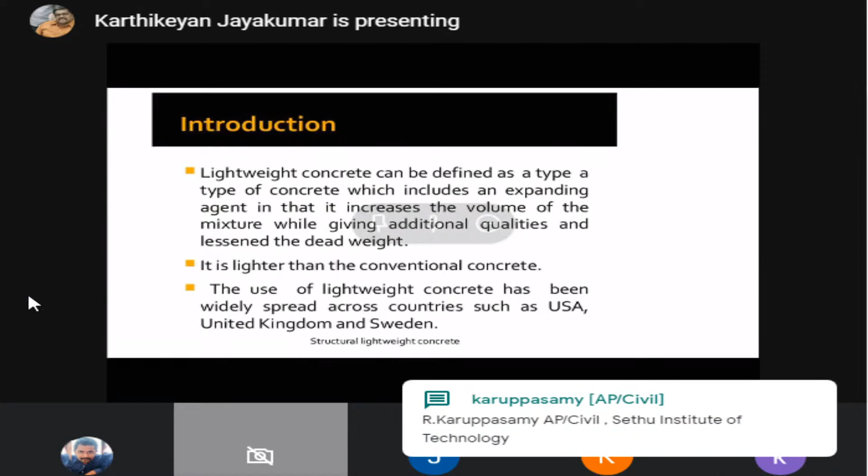So here we have to use some lighter weight material. We cannot make cement much lighter, we cannot make sand much lighter, it is impossible. The only thing we can make much lighter compared to conventional concrete is our aggregates. So we have to play with that, and make the density mark just fit into that category. So what are all those lightweight materials?

Not all materials can be used as coarse aggregate in lightweight concrete. There are certain criteria. Normally when you see the guidelines for selection of coarse aggregate material, they say the aggregate should be tough enough, it should be sound, it should have good thermal resistance, it should have a very good repellent capacity, it should not absorb more water. So many criteria are there, and it has to bypass all those criteria.

The physical characteristics, the dirt should be completely removed, the aggregate should be clean and sound. They used to tell all those things. So what are all the materials that we can use to make concrete light, and what are all those lightweight aggregates, we will see in the field.

Before going to this, this is what I told earlier. If you see in this first slide, the theoretical portion, one of the advantages of using this is your dead weight of the structure gets completely down. Whenever you do some RCC calculation, say your beam size is something like 230 by 500 mm.

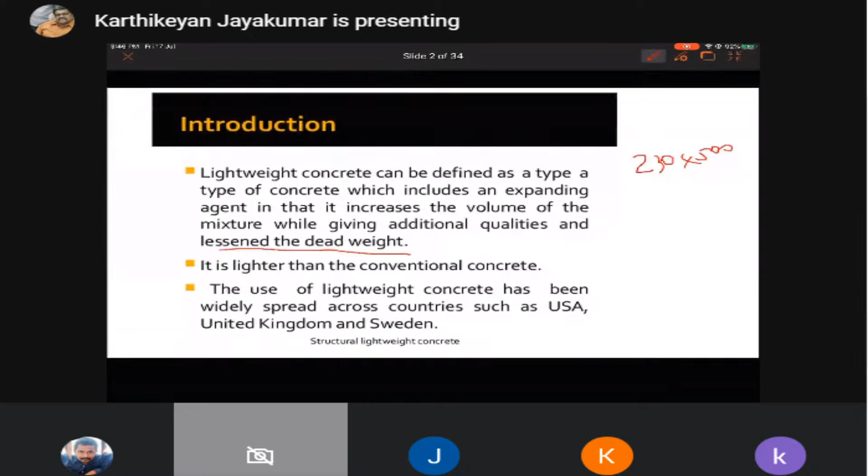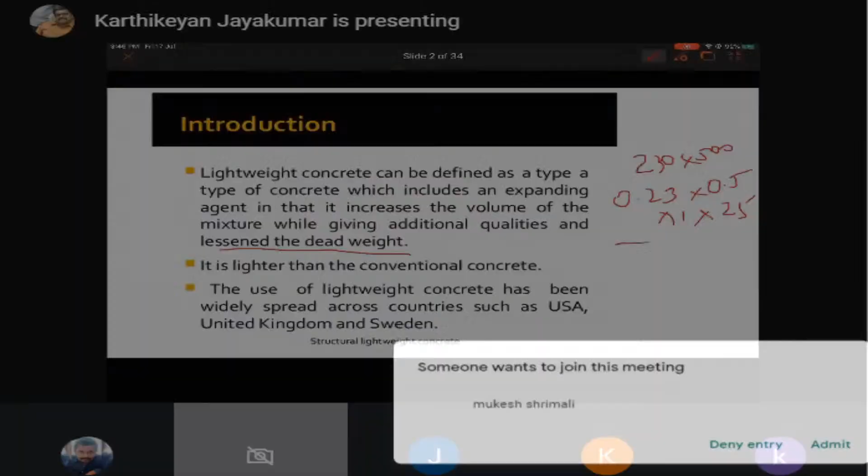But if you use lightweight aggregate with a density of, let's say, 150, just imagine the difference between 250 and 150 - that's 100 less. So nearly 100 kilogram is reduced for that structural unit, and it becomes very easy to handle. This is one idea behind it.

This is how you have to categorize the things. This is the advantage of using lightweight concrete.

So whatever happens, when your member is not much stiffened - if it is more stiff, it will be more prone to earthquake damage, because when it is too rigid, a horizontal excitation can cause the rigid structure to overturn at some point. It won't be able to bear that much horizontal excitation like an earthquake. When lightweight structures are used, the overturning moment and everything is fairly reduced.

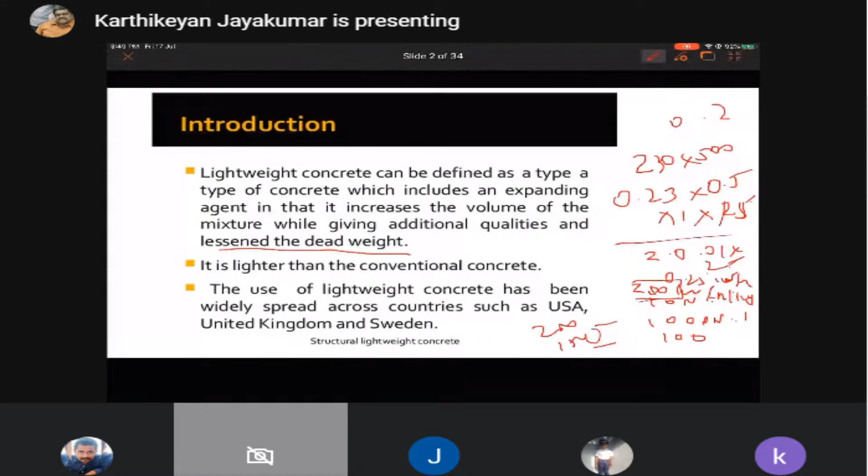I'm not saying it will not fail - it will fail, but the life... just imagine there's an earthquake and a beam or slab falls on your head. What would be the impact? You'd get injured - something falls on your legs, your shoulders, or a major accident happens, or a portion of the slab pierces and falls down. When conventional heavy weight is used and the dead load is high, the impact is worse. With lightweight, this effect can be minimized, so the overturning moment and the cause of failure are reduced.

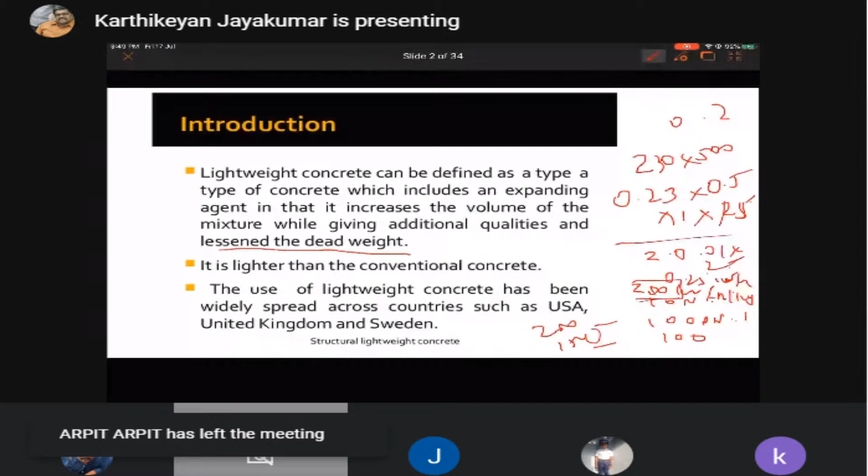Lightweight concrete has had widespread use in countries like USA, UK, Sweden and a few other European countries, where people use it as a traditional activity. Even in the US nowadays, houses use lightweight construction. They plan and orient the building and mostly go for wooden construction, since those are more prone to cold areas - they use lightweight concrete or wooden panels and wooden floors for house construction. Concrete construction is minimal for them. Most places go for only this lightweight component.

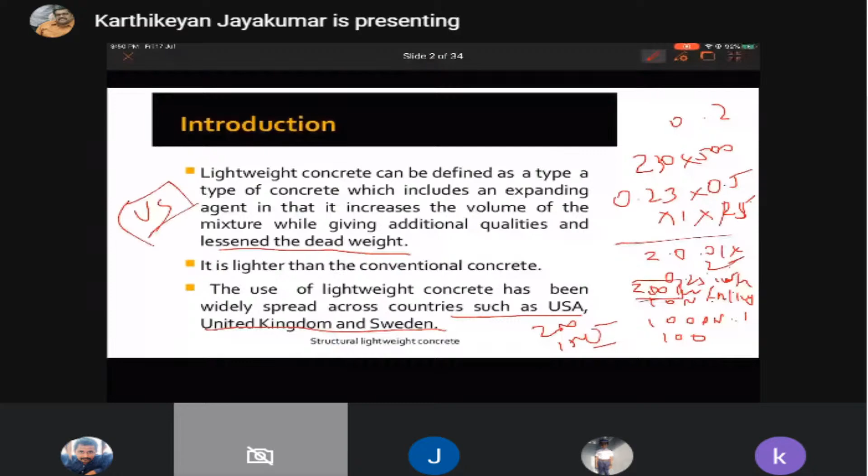In the next part - I mentioned structural lightweight concrete - how can it be made? It should have less density. As I told you, the density should be within 1300 or 1350 to 1800 kg per meter cube. Only then can you categorize it as structural lightweight concrete. You have to ensure your concrete density meets this range.

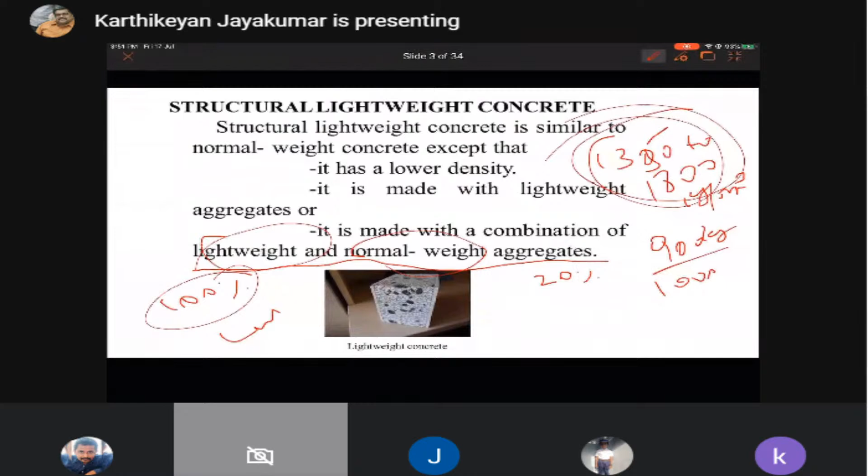There's a provision given here - you can use a combination, such as 30% or 20% normal weight aggregate combined with lightweight aggregate to achieve this density. It's possible, but you cannot use even 100% lightweight material, because then it might get down to 900 kg per meter cube. The density of water is 1000, so when you pour that concrete into water, if submerged, it will float - that is called foam concrete. That's another topic we'll cover in forthcoming lectures. This is the aspect to keep in mind for structural lightweight concrete.

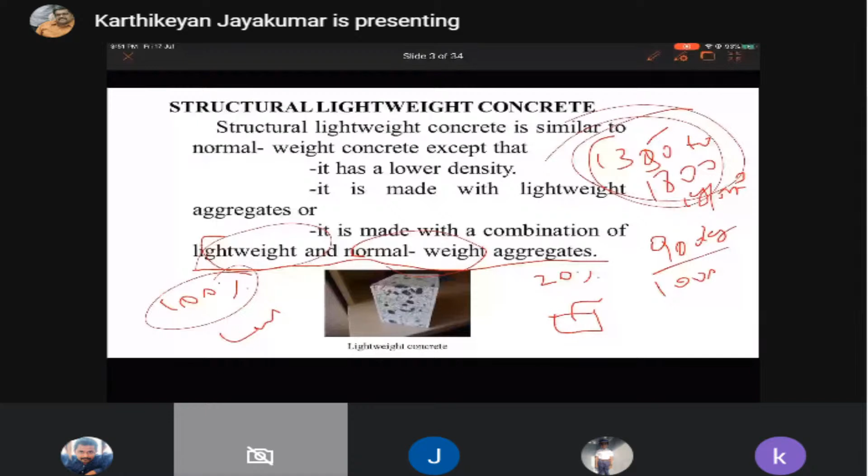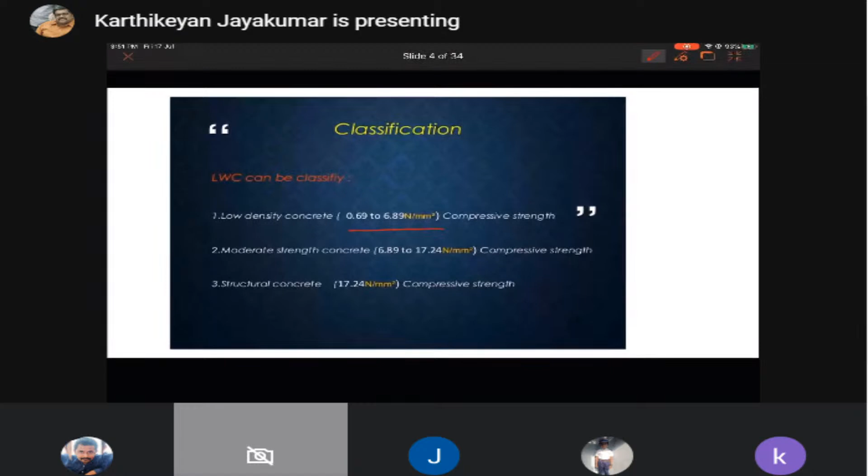So what are all the probable compressive strengths? If your compressive strength is categorized, say you are getting only 0.69 megapascal to 6.89 MPa, and you made a lightweight concrete testing the cube, with a density like 450 kg per meter cube, how will you categorize this? This classification is called very low density concrete.

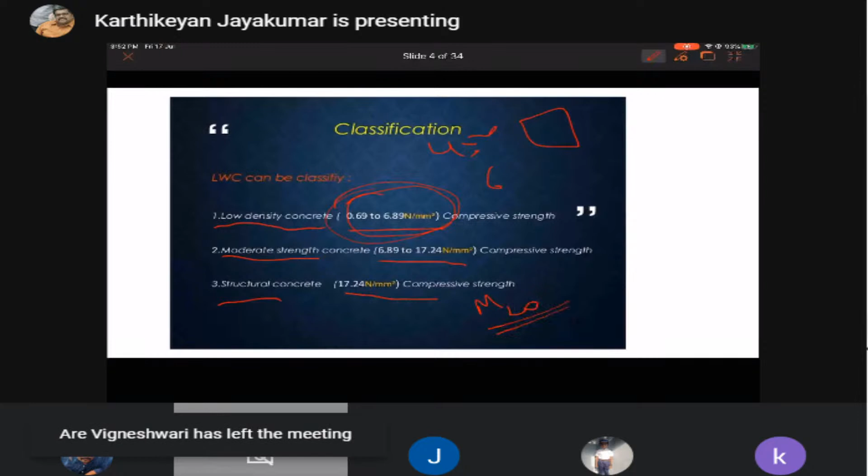When it is between 6.89 to 17.24 MPa, it is moderate lightweight strength concrete. Structural lightweight concrete is classified when it is above 17 MPa. That's why I told the minimum grade of concrete for structural lightweight concrete is M20. This is very important, you have to keep these things in mind, then only this classification will serve the purpose.

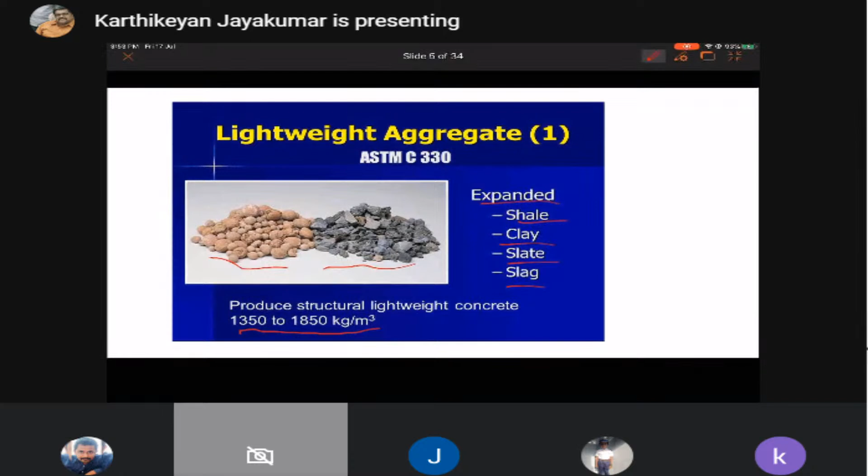This classification is given according to ASTM C330 category. Like how we have IS 456-2000, IS 10262, the ASTM classification is American Society for Testing and Materials. So like how we have Indian standard, this is American. ASTM classifies the lightweight aggregate for structural purpose as one of the classifications.

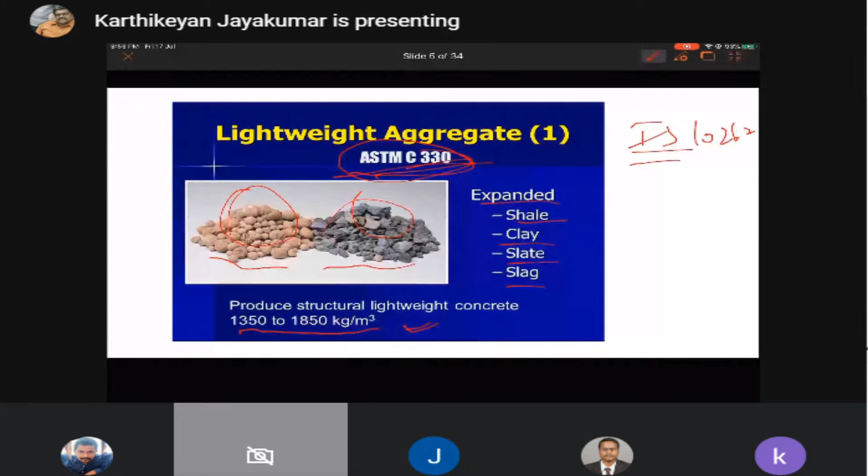So how can this lightweight concrete be achieved? It can be achieved in three different ways. First, replace normal aggregates like shale, slate, whatever it is, by some cellular porous or lightweight aggregate, you can bring that. Next category, you can introduce air bubbles into the mortar, which is called aerated concrete. Then you can completely omit the sand and use coarse aggregate, which is called no fines concrete. So these are some possible ways.

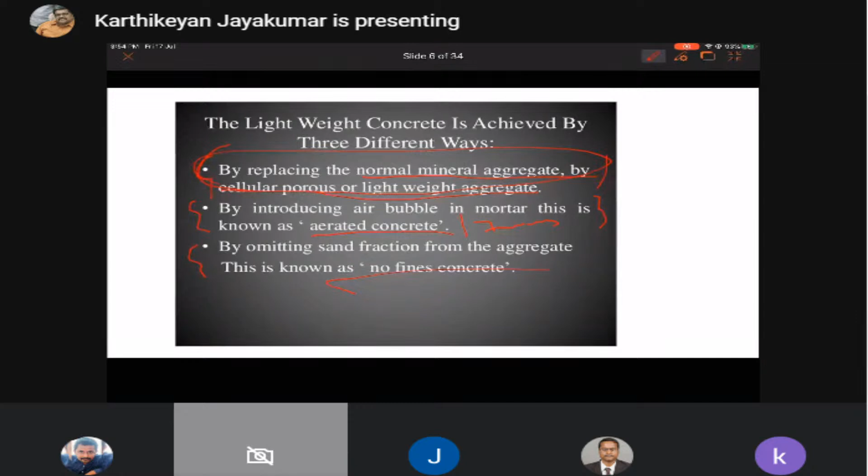How to make this aerated concrete, how to make this foamed concrete, all these things will come in one category. In another category, you directly have certain lightweight aggregates like expanded shale or slate, many categories like that, because it's a naturally available form. In some places you might not have this mineral or type of aggregate; say aggregate X is not there, but aggregate Y will be present. So depending on the place, you can choose the appropriate aggregate. These are the three different ways you can use.

No fines concrete is very useful for pavement applications, especially where water gets logged into the pavement surface, causing potholes in roads. In order to avoid potholes or damage in the road, they use no fines concrete. I have a beautiful video, you can see that in the later part of this lecture.

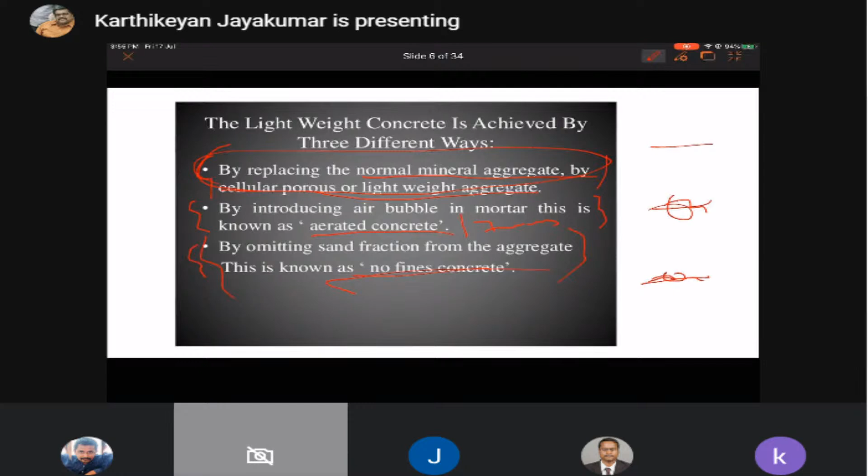Let me now quickly move on to the next slide. So these are the first category, using some lightweight aggregates. Natural lightweight aggregate and artificial lightweight aggregate - again categorized into two types. Under natural aggregate you have pumice, scoria, rice husk, diatomite, volcanic tuff, foamed lava. These are all natural forms.

Artificial lightweight aggregate means we have to manufacture it: sintered fly ash, foamed slag, bloated clay, artificial cinder, expanded shale slate, coke breeze, expanded perlite, exfoliated vermiculite. These are all artificially available lightweight aggregate materials you can use.

From one place to another, volcanic tuff might not be available in one locality, but scoria will be abundantly available. Scoria is obtained from aquatic plants, found in river beds and deep sea beds where you can extract it. It is in the form of a reef and other things, which are highly lightweight, so those things can be used as an aggregate.

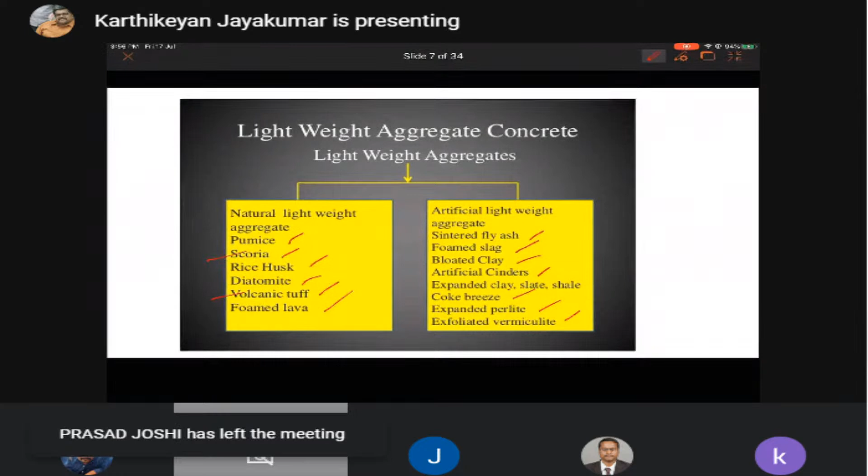I'm telling you, the explanation of each and everything will be shown in the forthcoming slides.

The first aggregate is pumice, a rock from the volcanic region. Its bulk density varies from 500 to 800. The texture is fairly even, interconnected with voids, and it is very light colored, nearly white.

Scoria is a lightweight aggregate of volcanic origin, dark in color. I earlier said scoria is aquatic, but that's not correct - diatomite is from aquatic sources. Scoria comes only from volcanic regions, wherever volcanoes are found. The dry form is simply slightly weaker than pumice - that is its property.

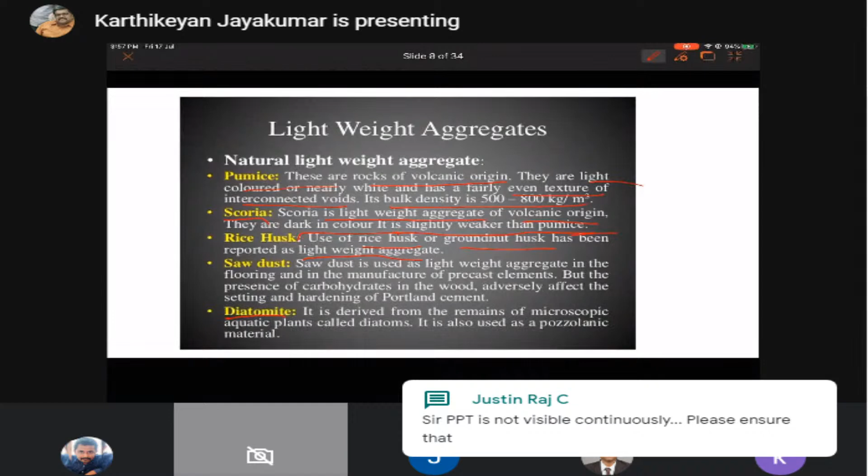Next is rice husk. The use of groundnut husk has been reported as a lightweight aggregate. Many people have used it because it is very light - the shells and everything are very light - so they have used that for this purpose.

Next is sawdust, used in the topping of floorings and other applications - that is very essential. But the wood adversely affects the setting and hardening with Portland cement. That is the only problem - setting time issues arise when you use the wooden material directly.

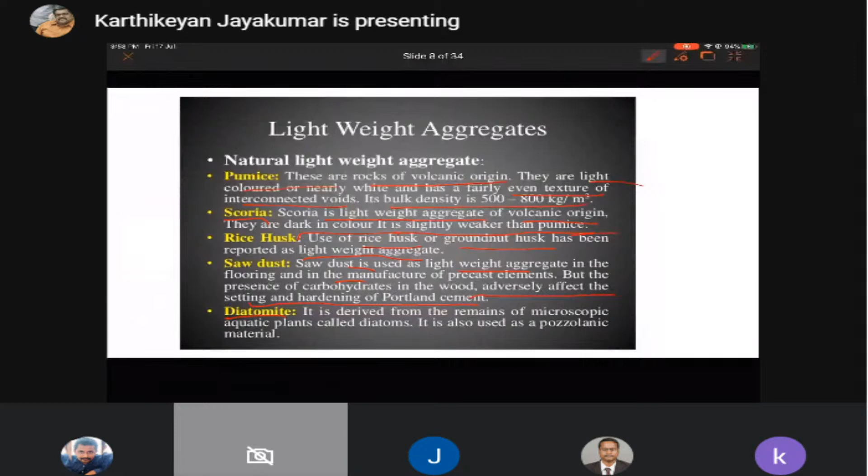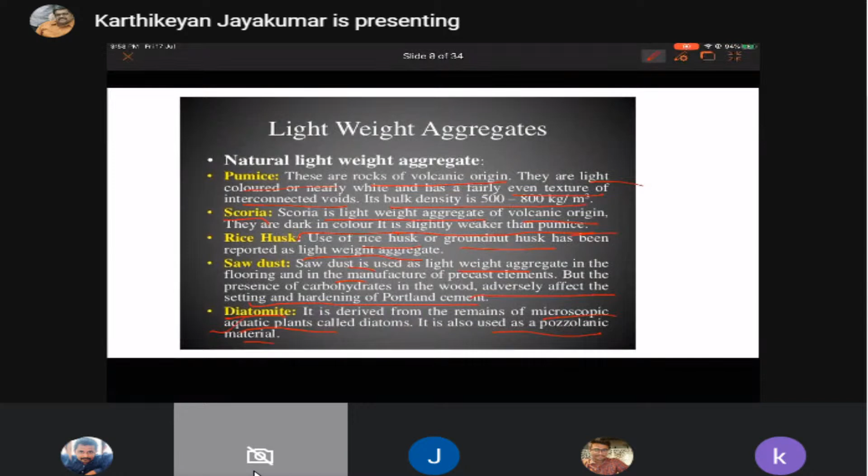The next one is diatomite, as I mentioned, from aquatic plants. It has a high pozzolanic property, acting as a high pozzolanic material. It is quite microscopic, comes from aquatic plants, and is very light in weight. These are some natural lightweight aggregates.

This photograph shows pumice and what scoria looks like. Mostly these are obtained from volcanoes, which is why you get these sorts of pores, due to the melting of molten magma and other factors.

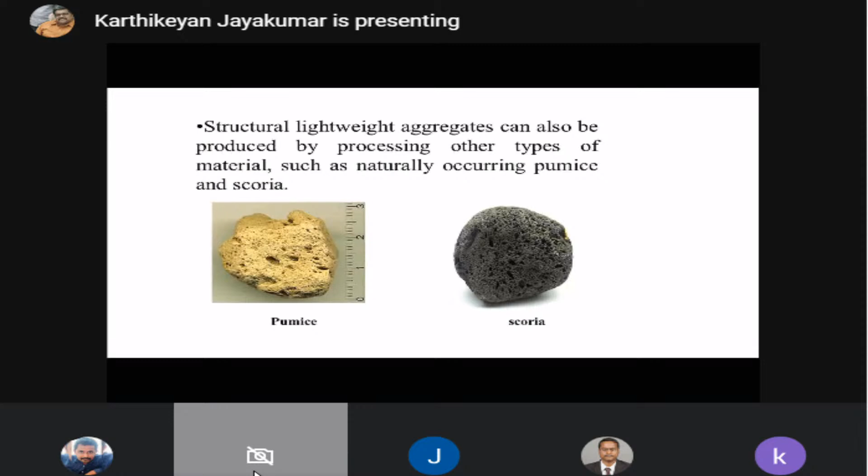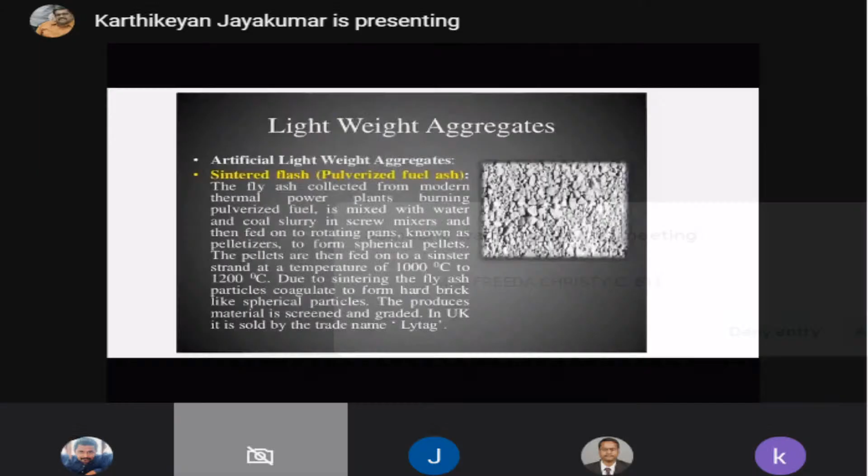The next lightweight artificial aggregate is sintered pulverized fuel ash, that is fly ash. You know how fly ash comes about - you artificially create small round pellets. You can also manufacture using slag, through some treatment process.

With that treatment, bloated clay is also available, which tends to expand. When using gas forming agents with it, it gives very good marine applications. Especially for aerated concrete, you will use this gas forming agent - it acts as a gas forming agent.

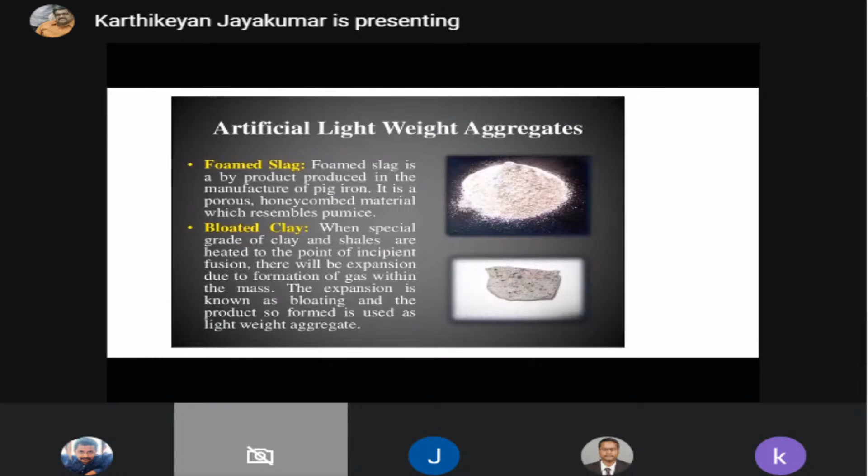Bloated clay, since it has an inbuilt structure like exfoliated vermiculite, is similar - these are used for fertilizer and animal feeds, as a small portion in animal feed. So that one we can also use.

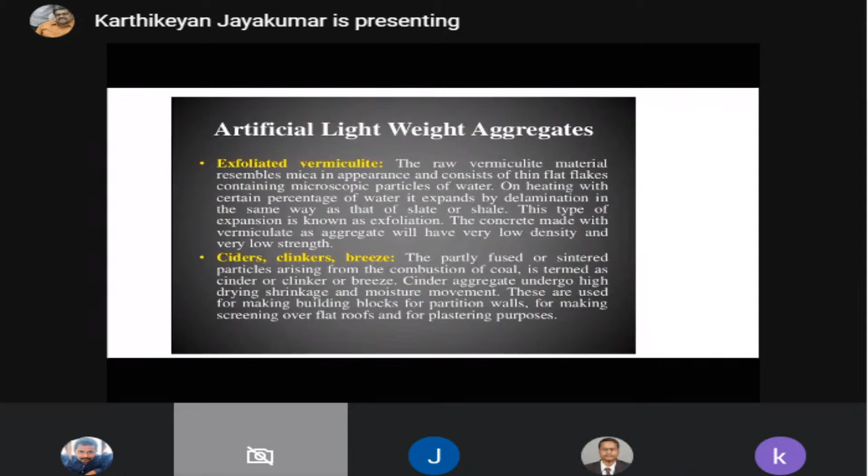Then cinders and clinkers are all obtained from coal, as various formations of coal. Black coal is different, and lignite is a type of coal with different parameters. Similarly, cinders, clinker, breeze are all types of coal byproducts, with performance varying and abundance differing from place to place.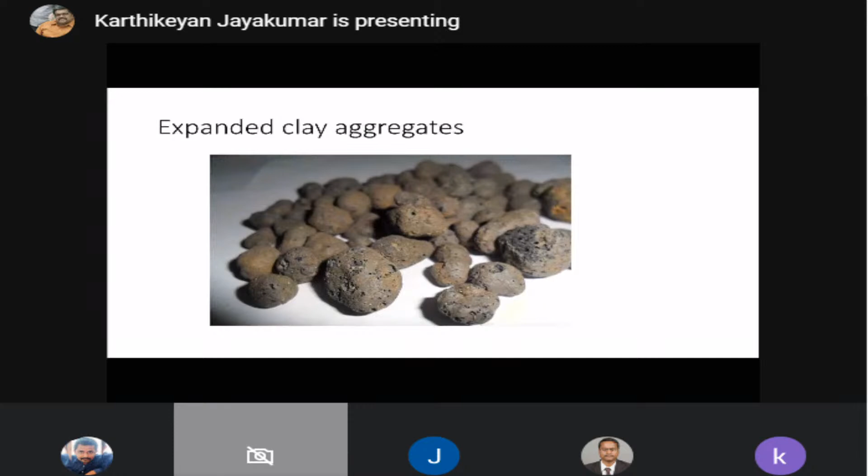But you have to be very careful when using glass aggregate. I won't normally give this work to my students, because with glass you have to use steel gloves and handle it carefully - you cannot handle it with ordinary hands, and rubber gloves won't work either since it will tear and the glass will pierce through. So I am a bit reluctant about this.

When using glass aggregate, you must ensure there is no reactive silica. If there is reactive silica, it will create durability issues, like severe alkali aggregate reaction and other problems.

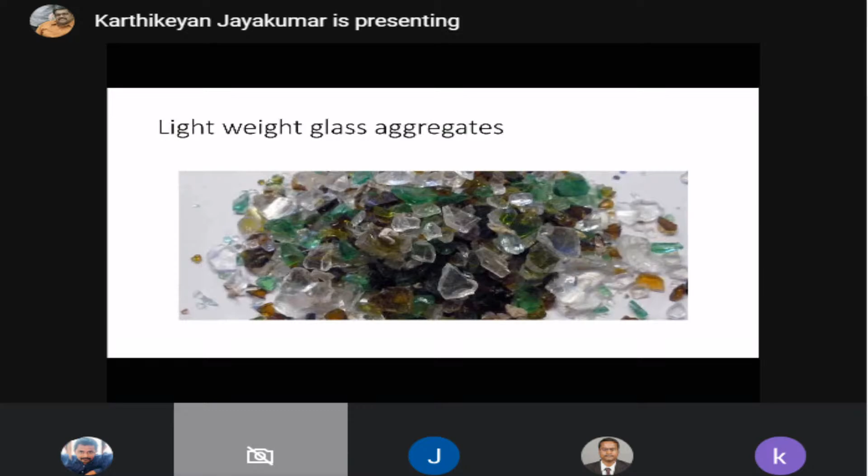So you have to take care of that. But glass aggregate, I am highly reluctant to use, though it is a very good material, very lightweight. The handling is problematic because some portion of those things can tear your fingers or enter into your skin, even small glass pieces at a micro level, and it might affect your veins and other things. That's why I am very reluctant to give it to my students.

So these are the various forms of glass. They have sieved it in different types of sieves, say from 0.1 mm to 8 mm sieve. This is how they have artificially manufactured the glass aggregate.

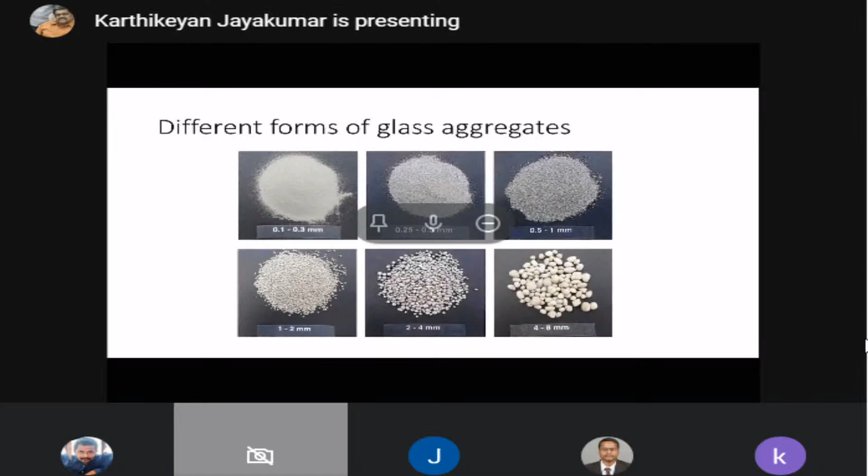Now with this, when you use these things naturally, what is the advantage? The first and foremost advantage of using this lightweight aggregate is cost. But when lightweight aggregate is marketed, it is very costly. If you are able to manufacture it on your own, it is good and very cheap. So that is one thing.

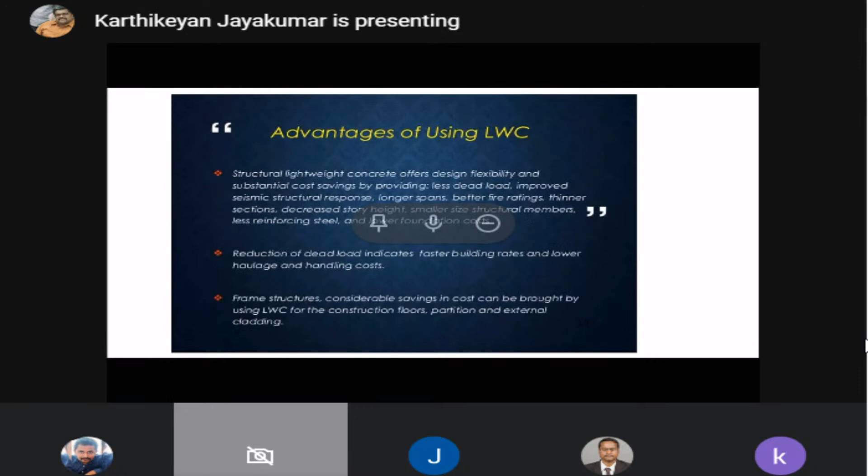Then, as I told you, one salient point about seismic excitation whenever it occurs - here you have less dead load. That is the purpose of using lightweight concrete, but more importantly, it gives improved seismic structural response. So that is key here.

Lightweight concrete also has very good fire resistance compared to normal weight concrete. Because of its lighter weight, it has very good resistance and will not burst, because when the toughness of the aggregate is more, and the coefficient of thermal expansion is quite large for conventional aggregate, but for these lightweight materials the coefficient of thermal expansion is much less, that's why it withstands fire better. So this is one advantage.

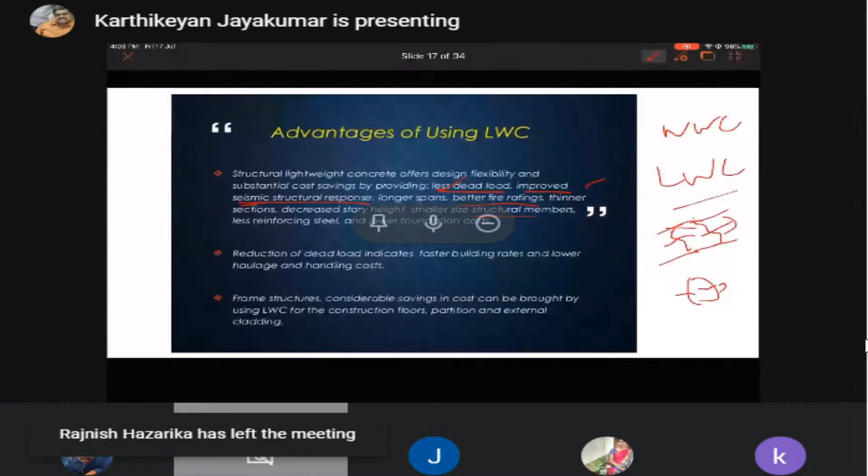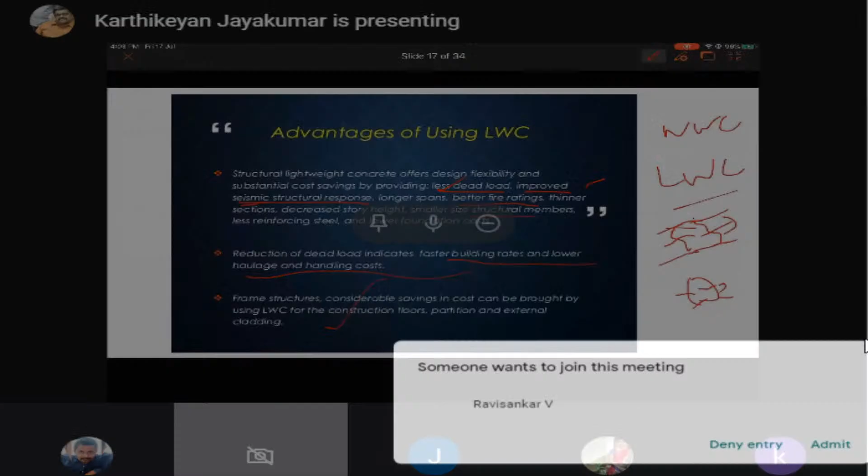Naturally, it allows faster building rates - you can erect structures as quickly as possible, the lighter the weight. So in framed structures, using lightweight materials for partition walls and other things is very advantageous. This is the main advantage of using structural lightweight concrete.

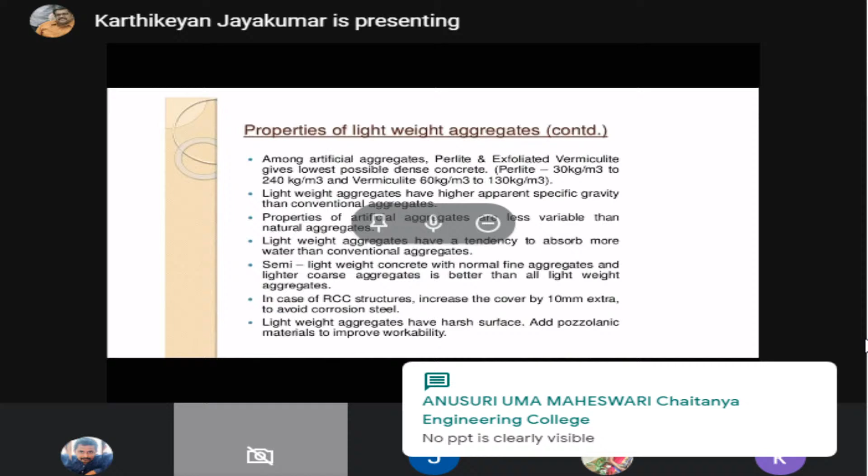Otherwise, if you want an overlay where the dead weight of the structure should not be fairly affected, you can use a lightweight material for overlaying purposes - for example, vermiculite-based lightweight concrete. Especially for electrical linings and similar applications where you want to seal it later with some additional layer, but the dead load of the structure should not get disturbed, a 300 kg per meter cube concrete will be very valuable. So that is what we are talking about here.

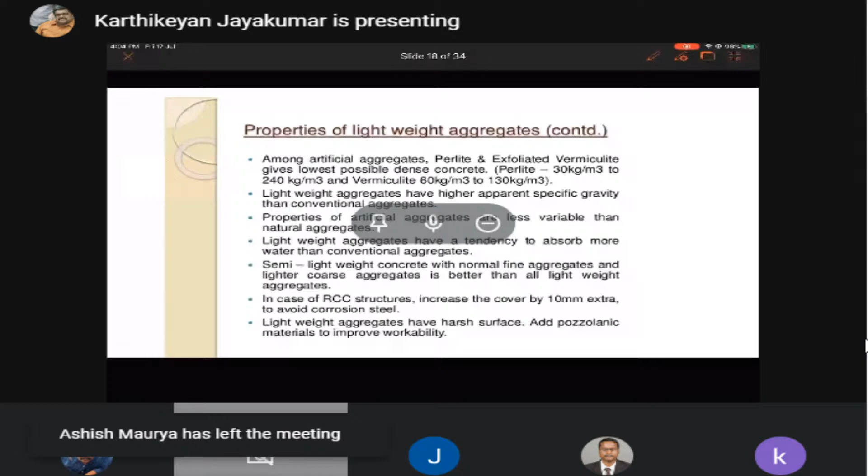Apart from that, the next disadvantage is that it will absorb more water. Lightweight aggregate absorbs much more water. Suppose your water absorption is 0.7% for conventional aggregate, but for lightweight aggregate it can even be 28% or 30%. So it can range anywhere from greater than 1.5% up to 30%. You have to account for this absorption rate properly and design accordingly. If you fail to do the water absorption tests, it is not advisable.

It will fairly affect the flowable characteristics of concrete. Another important point is that you have to increase the cover size when you go for lightweight concrete - an extra 10mm or so - in order to avoid corrosion, because it will be more prone to corrosion. Due to its lighter weight, you will not have a dense transition zone, so the bonding will not be very significant and it will not be highly impermeable. So you have to increase your cover size. Suppose normally you keep 25mm cover size, when you use lightweight aggregate you have to keep 35 or 40mm. That is the only thing you have to watch out for.

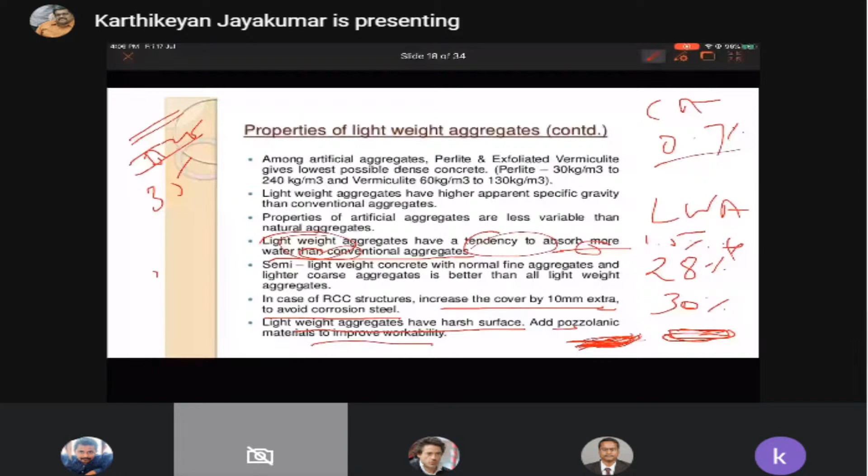Okay, so these are certain things. Lightweight aggregates have harsh surfaces, so add pozzolanic materials to improve the workability - you have to use some chemical admixture and also some mineral admixture to keep your strength intact. Suppose you want 30 MPa or 35 MPa strength with lightweight aggregate, you cannot achieve that with the conventional approach alone.

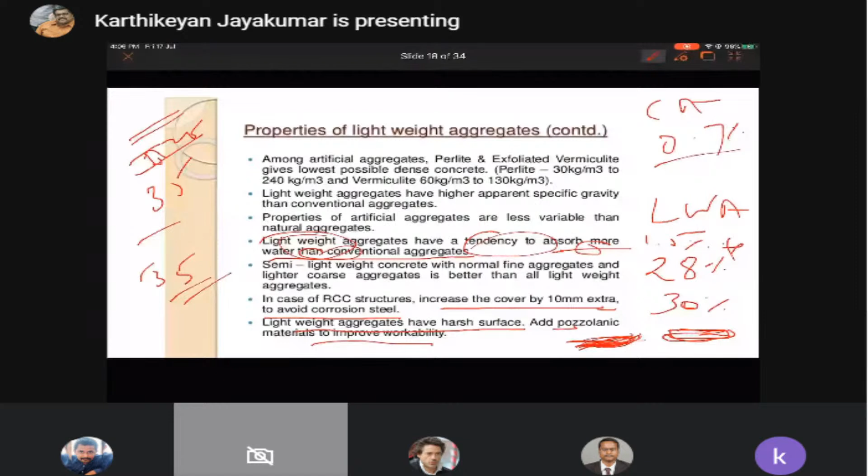You will get only about 17 or 18 MPa, but if you want 35 MPa, you have to take the help of these pozzolanic materials. This is another important parameter which you have to consider.

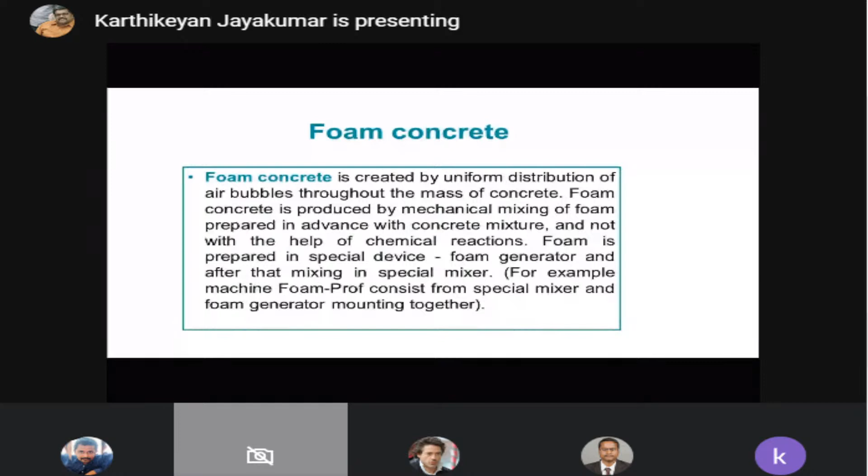Next type is foam concrete. For this you need a foam generator to mix the things, so you will be using some gas forming agents. You will be creating air bubbles inside, and it will come like a foam, where you can see lots and lots of air voids. This is called foamed concrete.

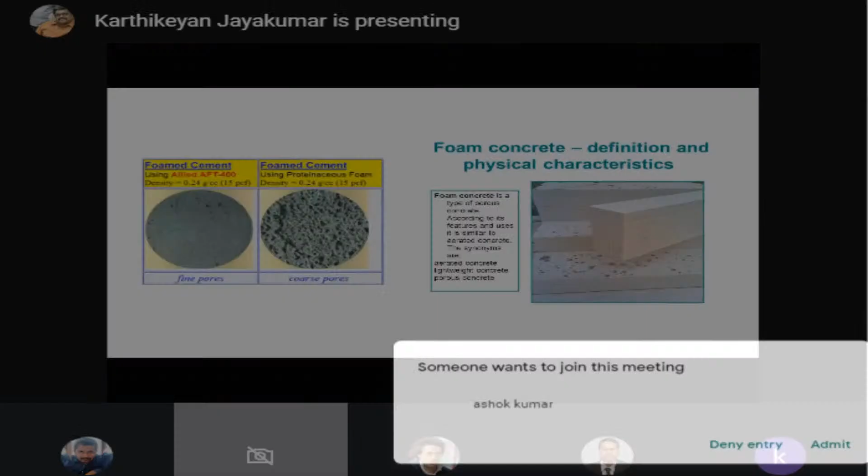It is also called aerated concrete. If you just put it in water, it will float, since the density is very less, just about 900 kg per meter cube. See here, it is not 1100 — it will be less than 1000, it should be 900, then only it will float. If it is 1100 kg, it will not float.

Normally, you will get a strength of only 12 to 14 MPa for the foamed aggregate. So this is the finish of foamed concrete.

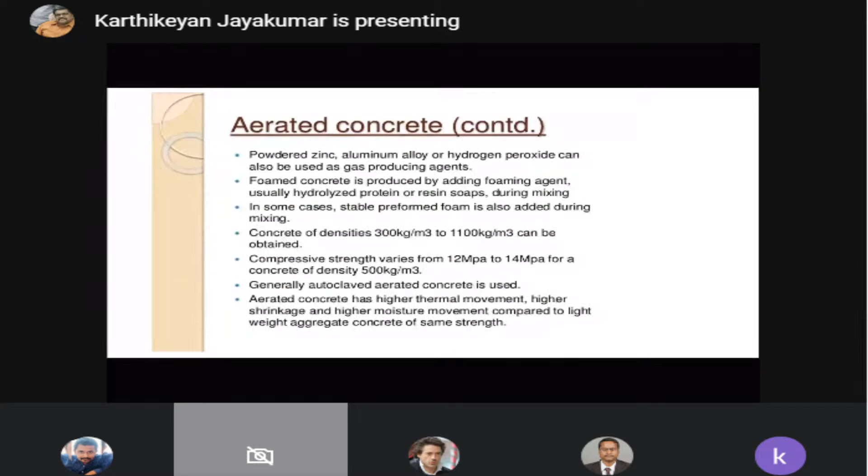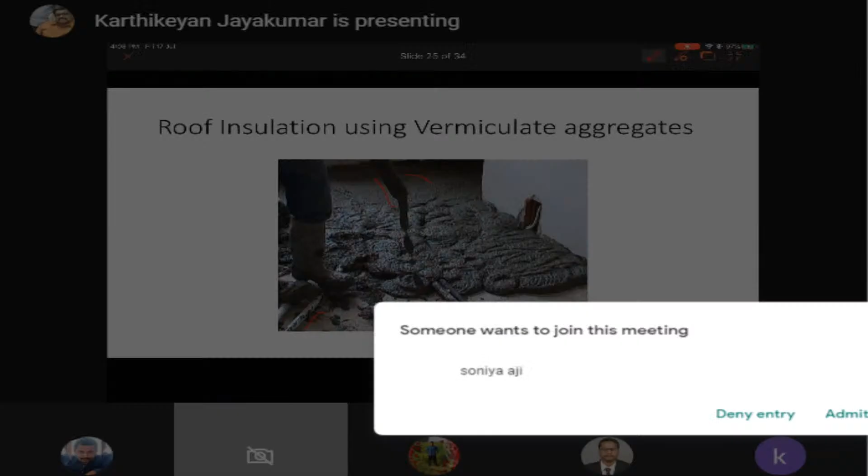So these lightweight aggregates for insulating purposes will play a vital role. That plays a major significance. In this way, lightweight concrete and other things are very useful.

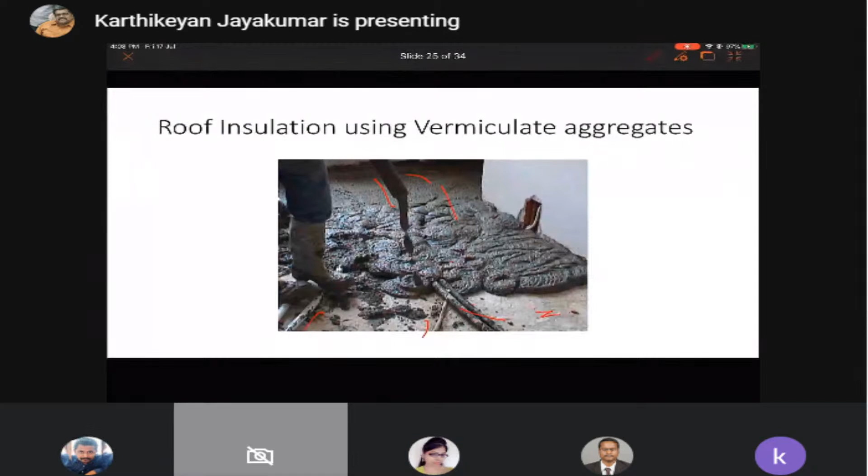Next, no fines concrete. In no fines concrete, you will not use any fine aggregate — you will be using coarse aggregate and cement, where if you pour water, it will act as a drain. This will be very useful for pavement applications. This is also called pervious concrete.

These are some innovative applications for pervious concrete, especially for retaining walls, where the seepage of water is very high. When you use this pervious concrete, it is very effective — for stormwater drainage or some deep weep holes for stormwater drainage, these will all be very helpful. Pervious concrete will be very useful.

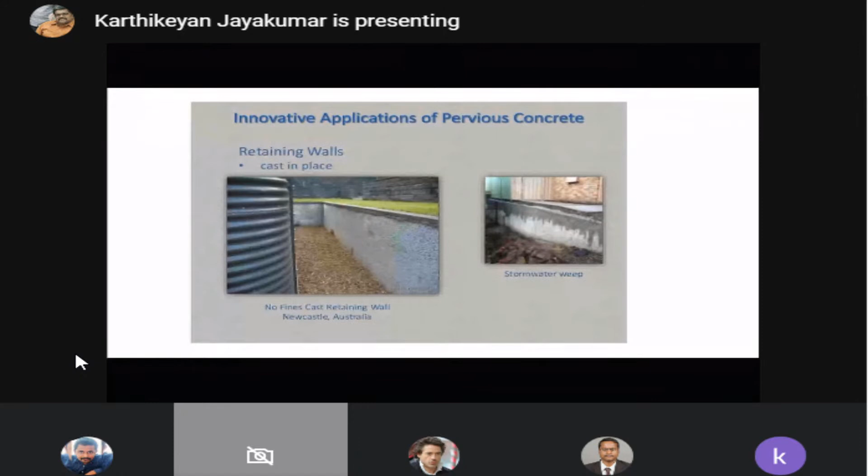This is a video showing pervious concrete, which will be a 1 minute video. You can see this — parallelly, you will be getting some wordings also. You can just see this. It's a very nice video about lightweight concrete and pervious concrete.

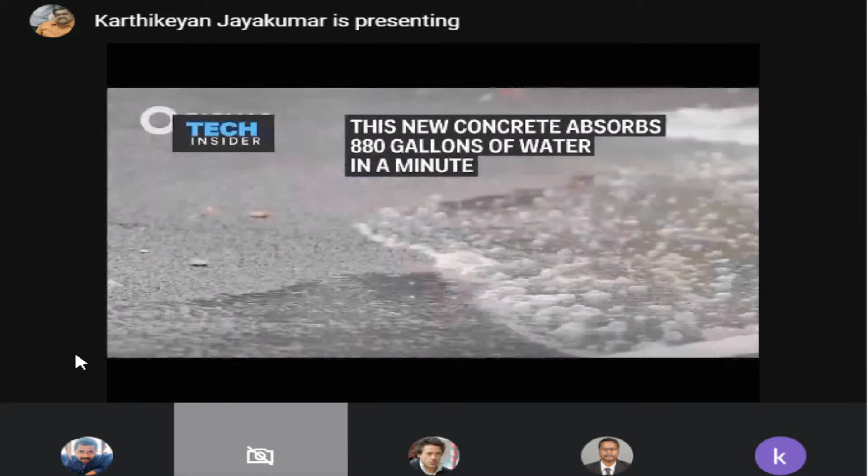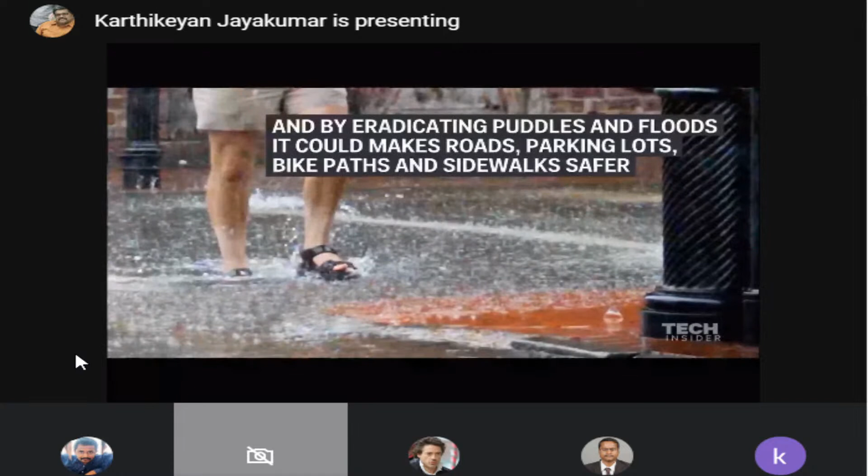See here, this is the no fines concrete, no aggregate, no fine aggregate.

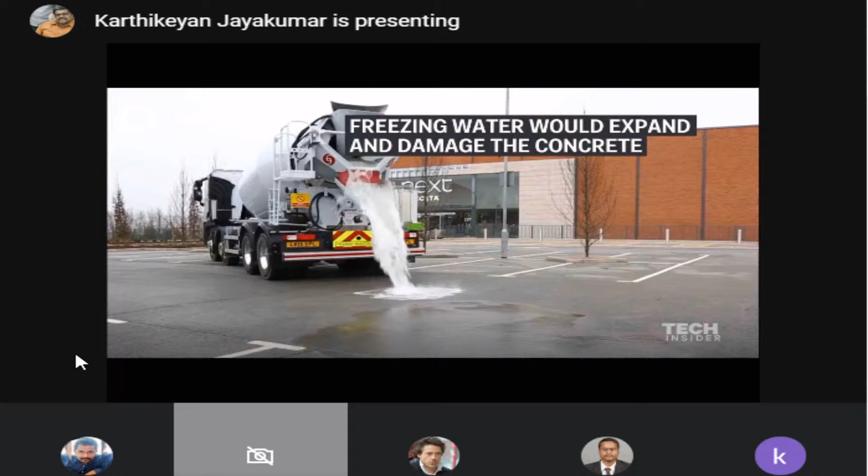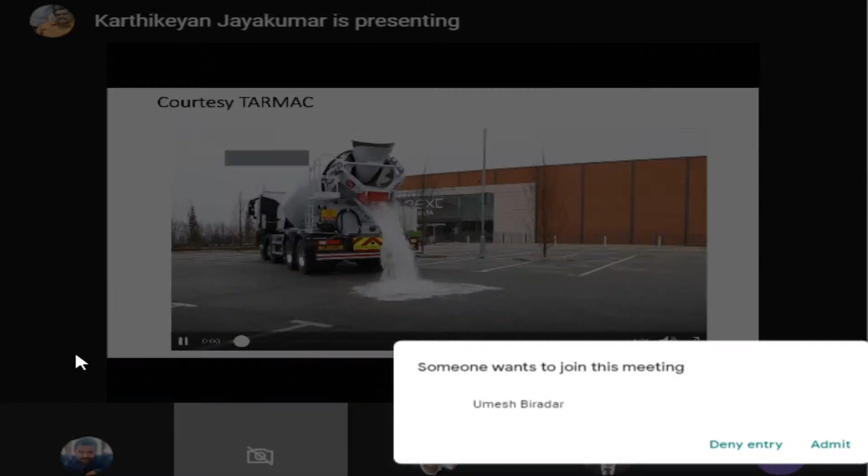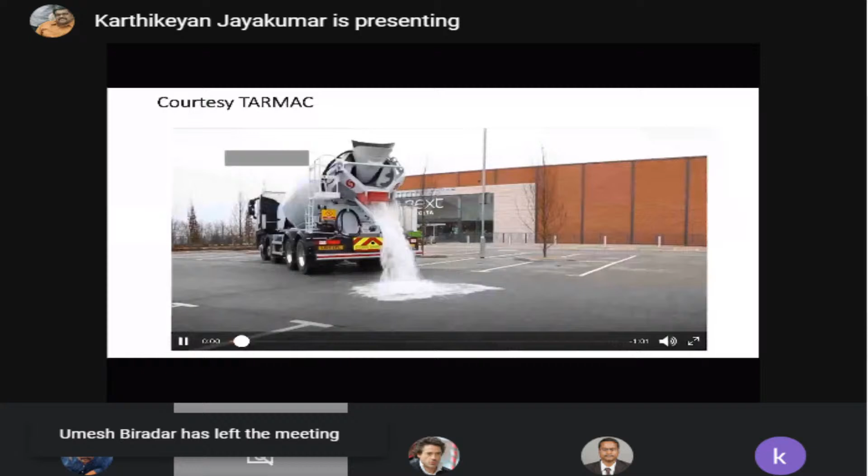That is the advantage of using such things, because you see nearly 600 to 900 gallons of water was poured on the paved surface, and see how nicely that concrete behaves — it has a very good absorption capacity. So thereby, if there is a heavy downpour like this, what happens? It acts as a groundwater recharge technique, so the groundwater will be recharged.

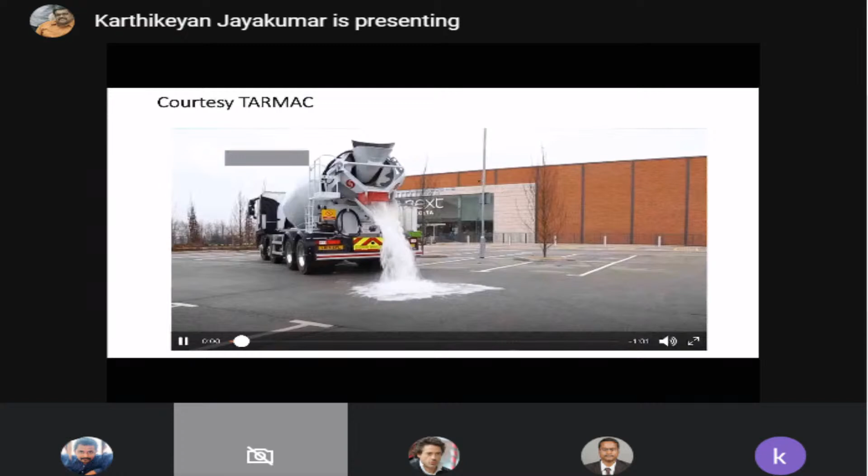There was some 3D view in a block form shown in that video, right? So that is the advantage.

Last slide is about how this lightweight concrete has come into existence, because normally when I study about these special concretes, I will be very happy to search for the history also — how they found it and all these things, because naturally I love history, what is the past, how they have done this, because I am a very fond person. So in that way, I have collected some source.

These wordings are really interesting, that's why I put this slide as the last slide: these early builders learned that expanded aggregates were better suited for marine facilities than the locally available beach sand and gravel.

You see this? So that volcanic material was very good. It was highly resistant also, it seems.

Then they went 25 miles, that is 40 kilometers, to the northeast of the Port of Cosa, to the quarry of volcanic aggregate at the volcano complex for use in the harbor. That is why it is called Port of Cosa.

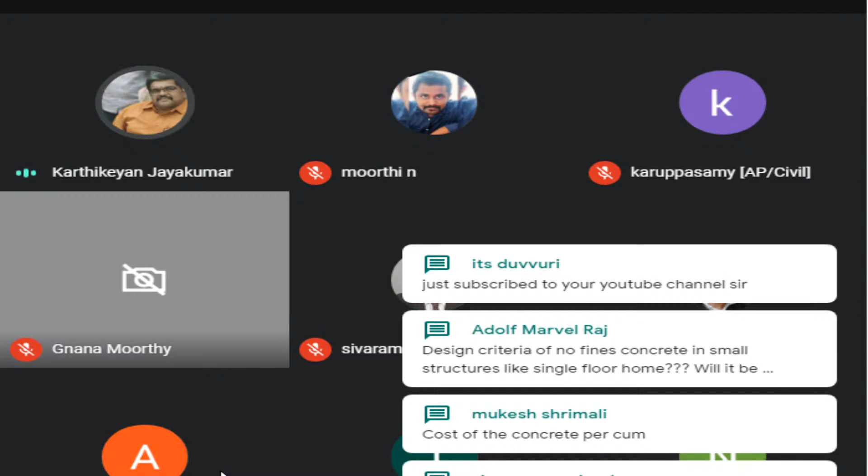Thank you, sir, for the wonderful presentation. Can we use lightweight aggregate concrete economically? Yes, you can use it. See, that's what I'm telling you. When you want to use lightweight concrete, if you want to enhance the strength, as I told initially, up to 70 MPa we were able to achieve.

But beyond 70 MPa, it is a million dollar question. You should have highly mechanized systems because when it is performing at 20 MPa and you're making 70 MPa, that is highly remarkable. So you don't need beyond that. Why do you want beyond 70 MPa? It is more than enough. They are using it for high performance, pre-stressed, lightweight pre-stressed concrete structures also. They have tried it and it is successful. But the only thing is you have to strictly adhere to quality control.

Mukesh Shrimali asks, is it useful for high-rise buildings? Yes, most lightweight concrete is used for high-rise buildings because when you go up the stories, in the top floors the number of columns will be reduced apparently. Suppose on the 50th floor, you don't need to give all the things. The size of the columns can be reduced effectively. You no need to keep 300 by 500 or 750 by 750. You can make it 500 by 500, depending on the design.